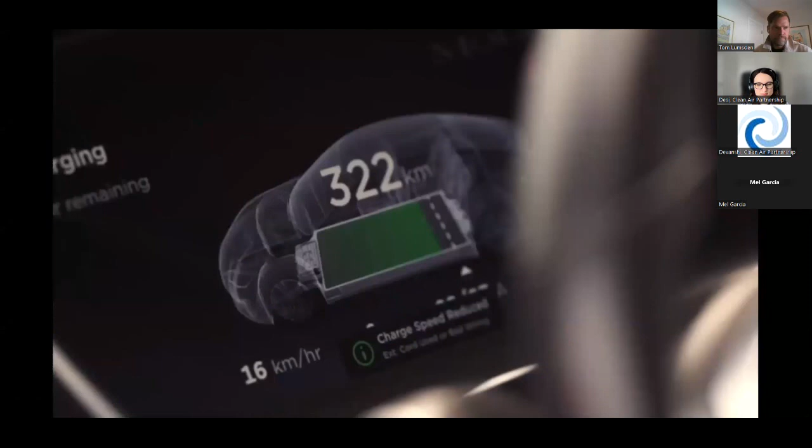How do we want to live? How do we create community during a time of change? How do we build places for the people who would call them home? How do we take care of our neighbors? How do we think about what a neighborhood should be? How do we get around them, to and from them? How do we power our lives when power has been a part of the problem? How do we remember our past while respecting our future? How do we make sure it's accessible to everyone, socially, physically, economically?

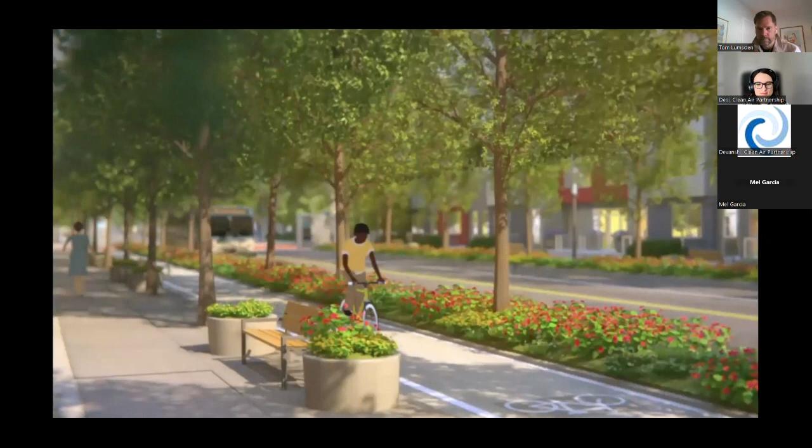How do we want to live? We're building a neighborhood where we can find the answers. Renewable infrastructure, sustainable design, historic, central, Blatchford. Urban design that's never been tried in Canada. A community that's never been tried like this anywhere in the heart of Edmonton.

We liked it so much, we'll show it twice.

One of the presentations is part of my job, and I really enjoy doing it. This morning I was actually at the air traffic control tower with what they call City Hall School, so grade 4 and 5 students. I've done this same presentation for a grade 2 class, and a master's university class. You just speak a little differently to it, but replaying the video is commonplace. It made the kids laugh whenever I get there. Anyway, we'll get to the presentation.

In 2008, so if anybody's familiar with Edmonton, we have the International Airport. It was built in 1960, and the intention was that all air traffic would end up there. It took 48 years for Edmonton to decide that that was a real thing. So in 2008, there was a vote, and they decided to close the downtown airport.

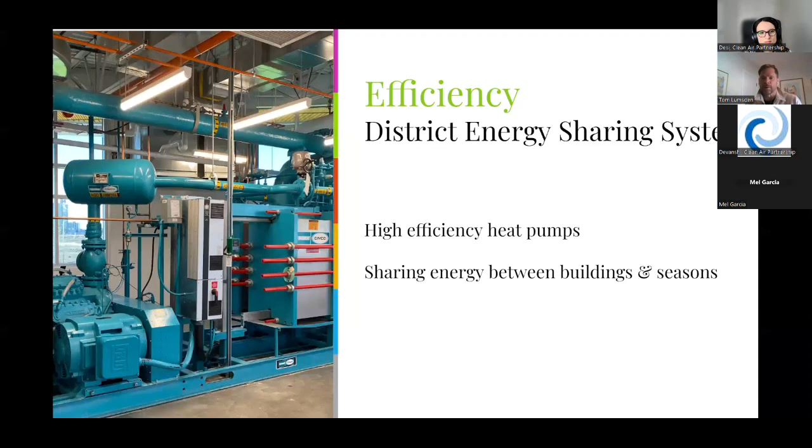But we have some sustainable builders that are very much, they know exactly what's going on. And then we have more household name builders that, well, my mechanical guy will figure that out.

Talking about our renewables, in stage 1 we have Geo Exchange, which is under our first storm pond. In future development, 2/3 of our energy is going to come from this. There are two 100-year-old sewers about 16 meters below Blatchford. They've been there a long time, and we're going to dig down to them and harvest the heat from the sewage.

This isn't the first time this has been done, and our utility team is super excited about this. I usually make some off-color comment about what it sounds like to me, but they promise we're only harvesting the heat, not the smell, but that's something we're going to have to deal with.

In future stages, 2/3 of the energy needed for Blatchford will come from the sewer heat exchange. And then of course, solar photovoltaic - it's solar panels. We have those in Blatchford. This picture is Energy Center 1, the outside. The previous one was the inside. We have solar panels on top to offset the electrical use that the heat pump inside requires.

So here's a video explaining what I just explained to you. If there's a difference between what I said and what this says, probably believe the video.

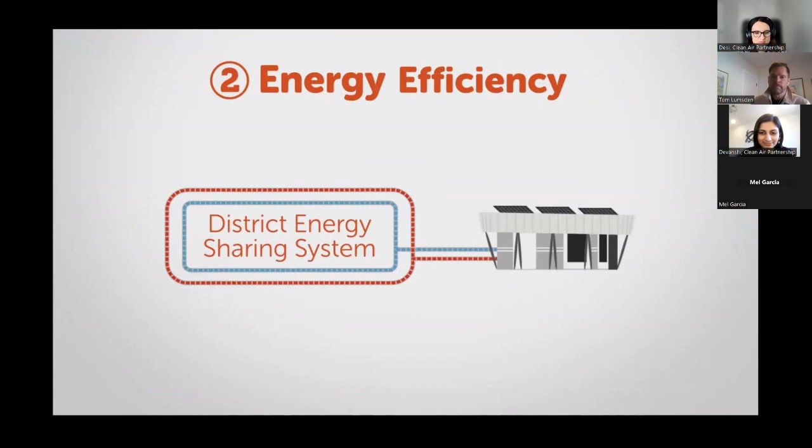Building one of the world's largest sustainable communities doesn't happen without a clear vision and commitment. Blatchford is being built from the ground up as a model for green, renewable, carbon-neutral planning and design. Blatchford's energy strategy focuses on three pillars: energy conservation through high-performance green buildings, energy efficiency driven by an innovative district energy sharing system, and the incorporation of renewable energy sources like geo-exchange, sewer heat recovery, and solar PV.

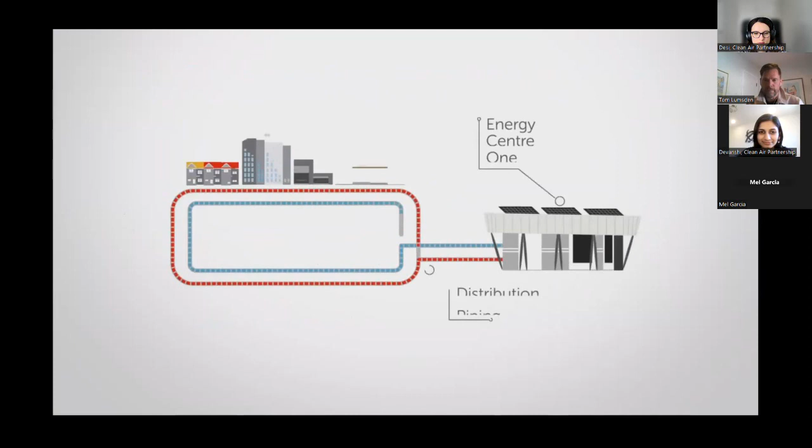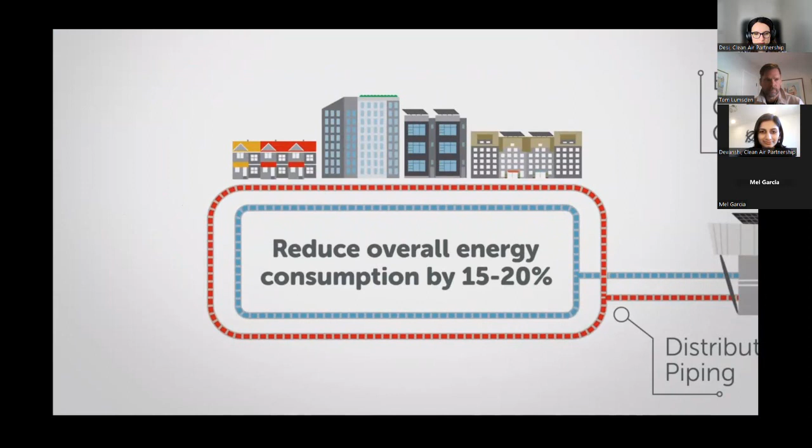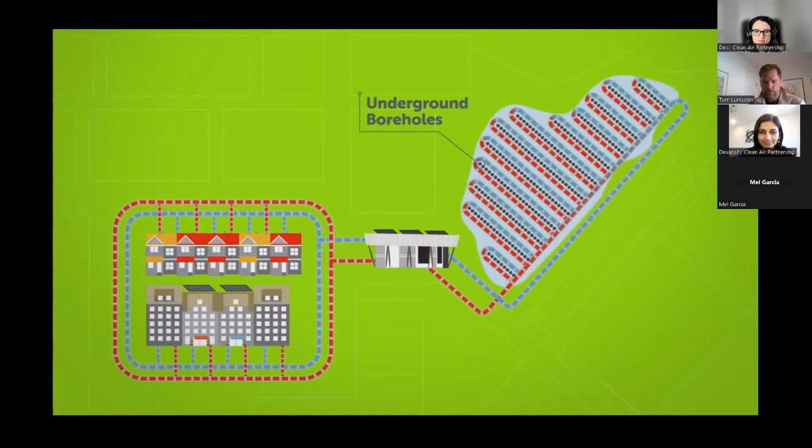Blatchford is supported by a district energy sharing system, a centralized system built in the community that distributes and shares heating and cooling energy throughout the neighborhood. Sharing energy between buildings can reduce overall energy consumption by 15 to 20% compared to traditional energy systems. The first stage of the district energy sharing system uses a geo-exchange field as its main renewable energy source. Blatchford's first geo-exchange field is located under one of our stormwater ponds and will support the first stages of residential development. Geo-exchange involves a system of underground boreholes that transfer heat to and from the ground, pulling natural heat from the earth in wintertime and transferring excess heat from buildings back into the ground in summer.

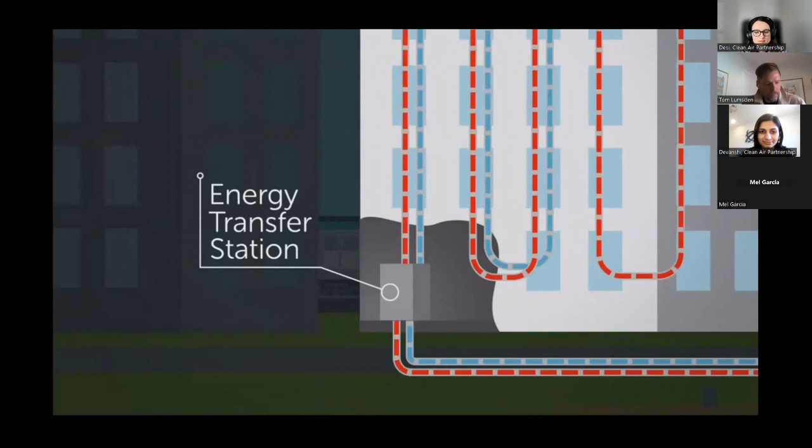The first energy center will be the heart of the initial stage of Blatchford's district energy sharing system. Using heat pump technology, the Energy Center transfers energy from the geo-exchange field to homes and back again through a network of water pipes beneath the Blatchford roadways. Instead of a typical furnace or boiler system, each building will have a heat pump-based energy transfer station, which extracts thermal energy from the district energy sharing system and upgrades it for the building's heating, cooling, and domestic hot water needs. Heat pumps upgrade energy more efficiently than a typical furnace, reducing Blatchford's greenhouse gas emissions compared to a business-as-usual community. By using a flexible approach and taking advantage of some of the most innovative and efficient technologies of today, Blatchford will help establish Edmonton as a leader in community-led renewable energy.

Oh, I was hopeful we weren't going to repeat the opening, but that was making me feel good because the students this morning thought it was funny.

Okay, so I kind of mentioned this. The Blatchford Renewable Energy is a utility that's set up, regulated by the Utility Committee, which is a council committee, and owned by the City of Edmonton. There's some talk later about challenges - it's an expensive system, it's expensive to be green. I usually say you're saving the world, you're not saving money, which is important. But as we move forward with carbon tax and things like that, this is obviously going to prove that it's a very important initiative, kind of the sign of the future.

Again, district energy is not new to Edmonton, but on this scale it is. I think when we're done, it's either the largest in the world or the largest in Canada for sure.

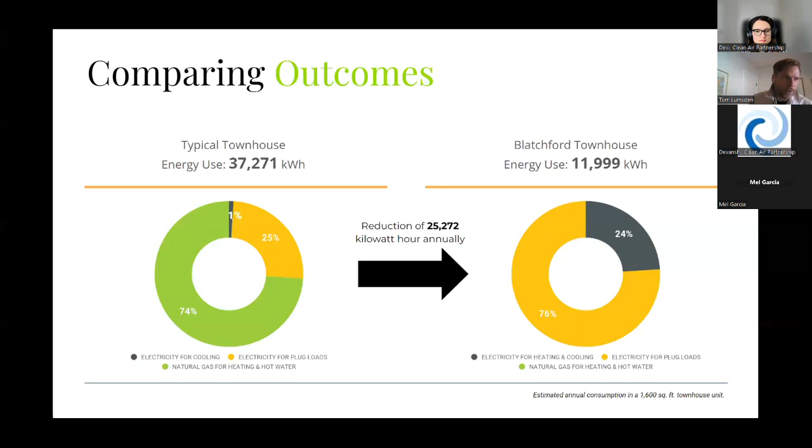This is one slide that I like to show. So when we're done, we'll be saving over 30,000 metric tons of greenhouse gases every year. So kind of a big deal in my mind. And this is what we're doing today.

One thing I didn't mention, while we're providing the energy to heat and cool your home, we aren't providing the electricity. So heat pumps, of course, use electricity, and in Alberta the grid is not clean. I think there's still some coal. It's being transitioned to natural gas, which is a cleaner source, but it's still not carbon neutral. So that's the one piece of the puzzle we still have to figure out.

Part of our green building code in stage 1, we were very prescriptive in what insulation had to go where, what kind of windows you had to use. In stage 2, we've said model it with our prescriptive method, and if you can do it a different way, go ahead. The second part of the change is we've asked them for enough solar to offset the major appliances in the home. So it's a step in the direction of getting to true carbon neutrality. One of our builders in stage 1 has funky roof lines that have solar that will offset, so they are carbon neutral from the beginning, meaning they'll produce more energy than they'll use in a year. So the opportunity is there.

I think the multifamily parcels, meaning the 4 to 6 story or the 12 to 15 story buildings, those are going to be a challenge in terms of solar. I know over time things have progressed, I'm sure the solar panels of today are way better than they were 10 years ago, so I'm anticipating that's going to continue to carry on. So we may solve that riddle sooner than later.

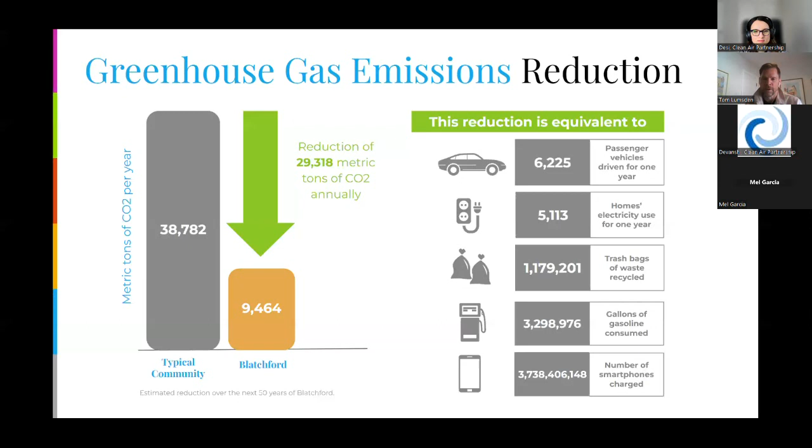But I like this slide because, I had a grade 4 to 5 class this morning, who has cell phones, so they can understand it's almost 4 billion cell phone charges, which is kind of what would be offset just by what we're doing today in Blatchford when we're fully built out, and all the way to how many cars will it take off the road. So I think this is a cool slide that most people can relate to in a way.

So, community development. As the developer, we have strong influence because we go away, we do our plans. This is the way the system works. I'm pretty sure across Canada, but in Edmonton for sure.

So when I was on the private side, I would decide what I wanted to do, you go to council, you get it approved. On the public side, working as the City of Edmonton but being treated like a private developer, same thing. We go away, we decide what we want the community to look like with the vision in mind. We go to council, they approve it - here they used an area redevelopment plan. I know those terms are different in different jurisdictions, but typically when I was in suburbia, it was an area structure plan and neighborhood structure plan.

Here we have an area redevelopment plan, which is more commonplace for a neighborhood that's changing. They want to make sure if somebody buys 3 single family homes, they're putting density in the right places. So Blatchford has been, our statutory plan is an area redevelopment plan.

We did a competition. This was before my time. This is the basic layout of what Blatchford's going to develop out as.

Blatchford West is predominantly residential. Blatchford East is residential too. There's 2 LRT stops, you can see that running through the east side, so there's a little more density. The 12 to 15 story buildings are planned for that side.

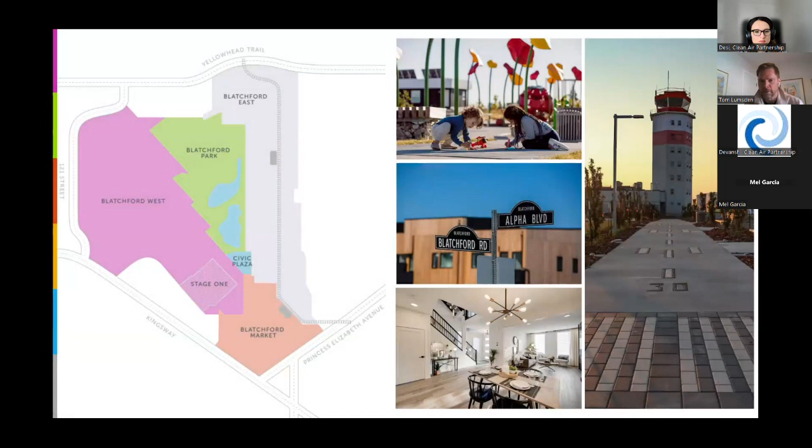You can see on the bottom left, stage 1. We've built stage 3, so we're stage 1, 2, and 3. We're skipping stage 4. We're going to build stage 5 this summer. So you can see we're focused on the west side to begin with, and you can see on the right some of the real pictures of things that are in there.

So stage 1 amenities. Again, we want people to come to Blatchford, we want them to stay, we want them to be friends with their neighbors and walk across the street. So this is the amenity right in stage 1. You can see the storm pond with people riding their bikes around it. We built out the walkways.

It is kind of dreamy. We have 45 homes occupied, so there's people living in the middle of the city in this big field. It's pretty dreamy if you go there at night, because it feels like their own little piece of Shangri-La that's currently being developed, but at nighttime it's quiet.

There's open spaces, they can go around the storm pond. You can see there's a playground in there, which obviously young families like new developments, and this is no different. There's an orchard with 5 different varietals of apple trees. We have community gardens, there's one of our low impact development.

You can see the silo. Essentially, it's going to collect the rainwater from the neighboring multi-sites, so a 4 to 6 story building is going to drain into that. It's really a huge rain barrel. And then the picture on the right is the air traffic control tower, which we are keeping.

It's right in the middle of the first stage. The base building is, I forget, 1,500 square feet. So it's going to be renovated. It was built in the 70s, so it's pretty asbestos-filled building. We are going to renovate the main floor. We're going to renovate the whole thing, but the main floor is going to be public space.